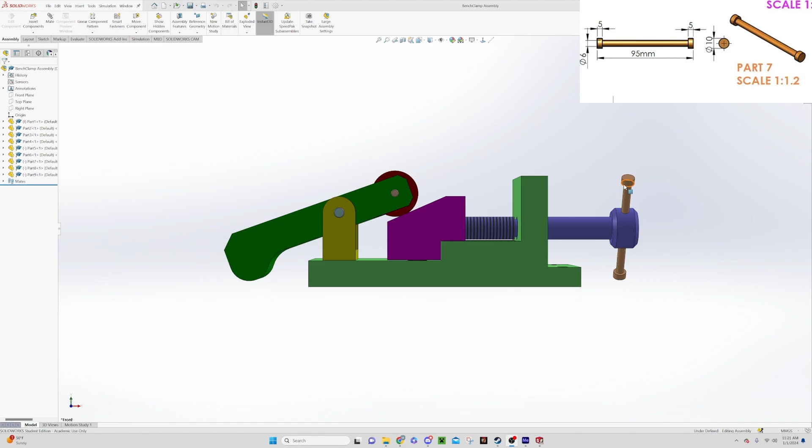In this next video, we will be creating this cross piece here on the handle. You can see here that it runs perpendicular to the screw and would be used to add a little bit extra grip if you were screwing this down.

We will also be creating these two pins that go through and hold in the piece. We'll have to look at some of the other drawings to get our widths for these, because these are not included in the main drawing, but we're going to create them as additional parts for this assembly.

All right, let's start off with part number 7. This is that cross piece that we were looking at for the handle. So we're going to go to the front plane, and we're going to start a new sketch.

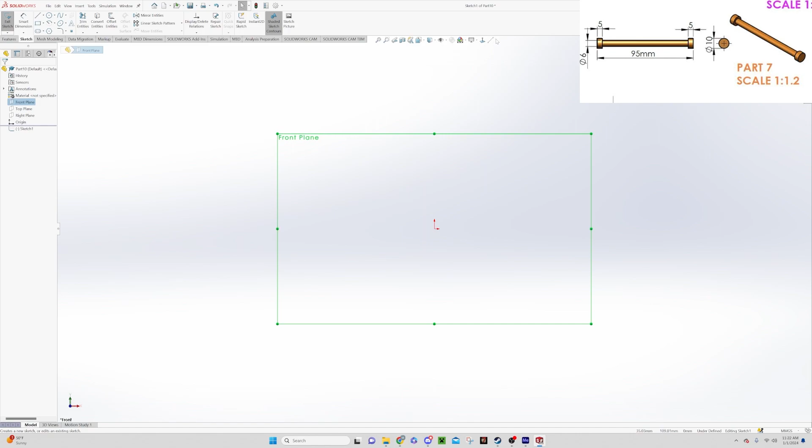Along this sketch, I want to put in 2 reference lines again. I'm going to put in a line here, and I'm going to put in a line here.

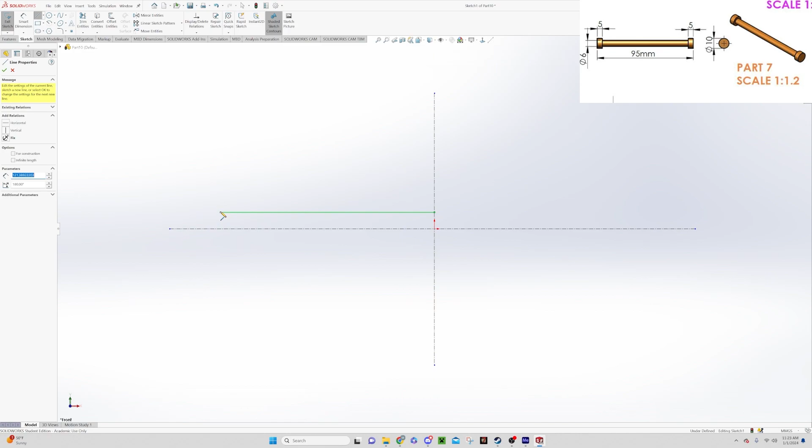Now what we're going to do is we're going to draw one side of basically 1/4 of this piece. So we're going to go with our line tool here, and we're going to start out over here on this edge. I'm going to draw over, up, across, and down.

So we have that done. And now what we're going to do is we can add in some measurements right now, but first let me just do some stuff here where we're going to mirror this entity.

So these 3 lines, we want to have them selected. We can say mirror entity. Entity to mirror, we can select these 3, or 4 I guess. And then we're going to mirror them about this line right here. You can see that makes a mirror on the other side of this line. And then we can say OK.

All right, now let's go in and do some smart dimensions. We want to say, we can look at the drawing from this line to this line. We are 95.

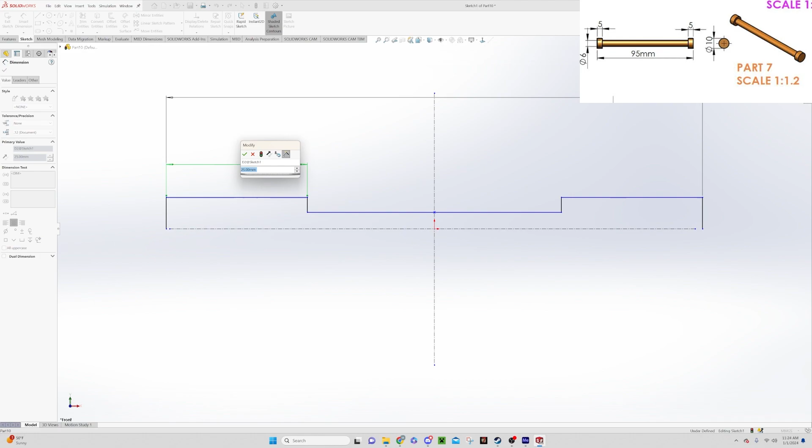This distance here is 5. Not 25, it should be 5. Sorry, 5. You can see that automatically adjusts both sides. And then we know that this total diameter would be 10, so half of that is 5. And you see it lifted off the line.

So one thing we're going to need to do here is we're going to have to make some adjustments, because we didn't draw this line quite long enough, and so it didn't associate this endpoint with being on the line. So let's just say OK here.

What we can do is we can click on this point. Well, let's do a few things. We can click on this line and we can drag it longer. Let's drag it longer on this side. That helps us out to start with.

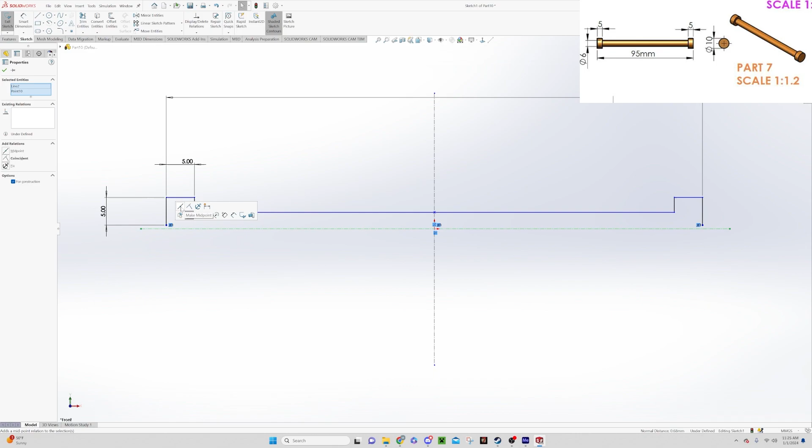All right, now we can click on this point here, push Shift, and click on this line. You get some options here for what you want to be able to do. We could have it make it the midpoint, we don't want to do that. We want to make it coincident, which will mean that this point is on that line. See, so it dropped it down on both sides.

All right, and then finally, the distance that we need to determine is the width of this shaft. So we can look at the drawing and we can see that the inner diameter is 6, so half of that's going to be 3.

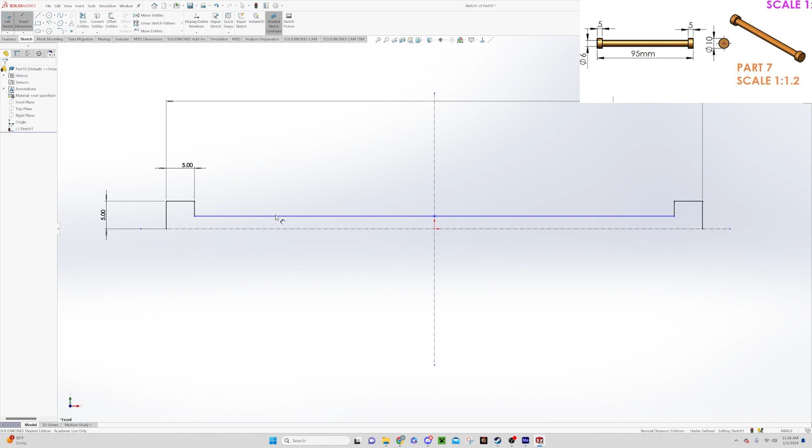So I'm going to say smart dimensions again. Click on the shaft, click on the line. We can say that we want this to be 3. And there we go. Now we're fully defined there.

What we don't have, though, is we could rotate this around, but it's not a closed feature yet. So we'll need to complete this, so we'll have to draw this final line here.

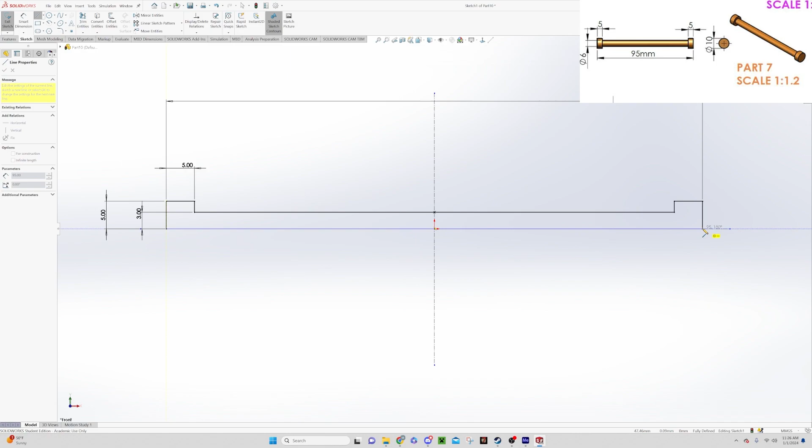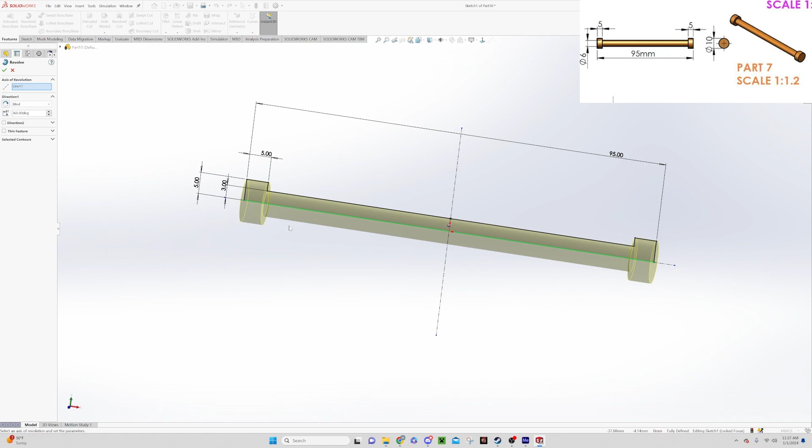There we go, now we've got our feature here. So now we can go to features and say revolve boss base. You can see it already picked the line it wants to revolve around, because that's the one that makes sense to the computer. We could revolve it around this other line, but it wouldn't make as much sense. We're revolving around there, so we can say okay. And there we go, we've got our final piece.

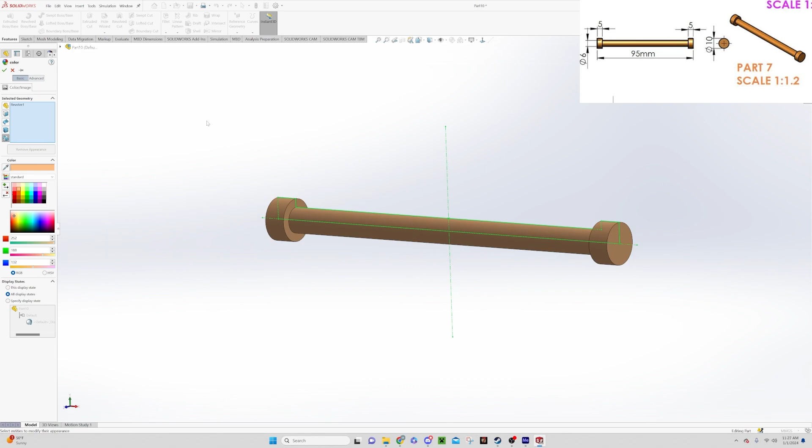Now one thing we want to do is change its color, so we'll go up here to color, and we'll make this final piece that orange color. Something like that, looks fine. Then we want to save it, and we'll save it as part 7. Like before, I already had this saved.

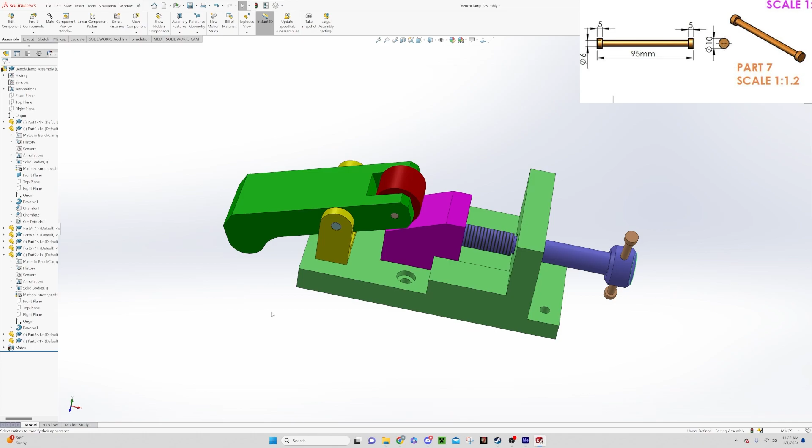Okay, so now we're going to make these pins. The 2 pins are actually different diameters and different lengths. If you look here, we have the width of this green piece, which holds the red cylinder in place. And then we have the width between these 2 yellow pieces that basically creates that pivot point. So we'll have to pull those parts up on the drawing and look at them to determine what our width is going to be.

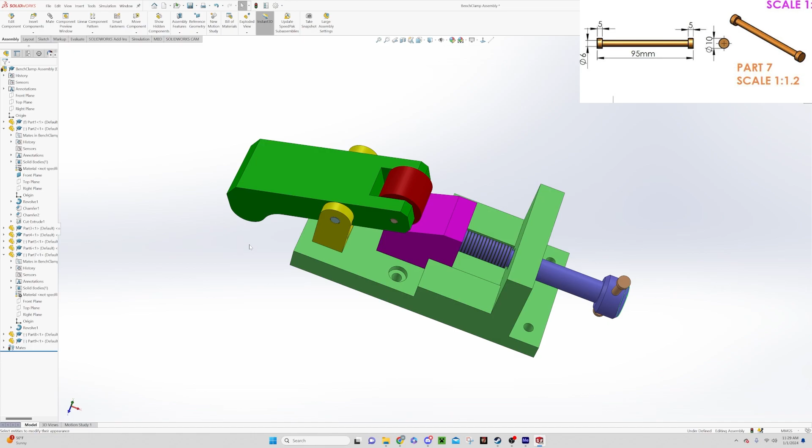All right, so the first pin we're going to make is the one that's going to go through this part 3 here. It's the pin in the back that holds the cylinder in place. So we look at that, and we see it has a diameter of 6, and we can see that its width is going to be 54.

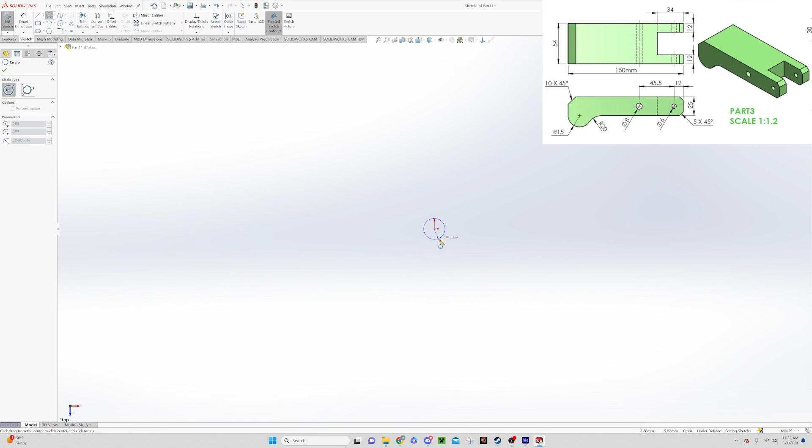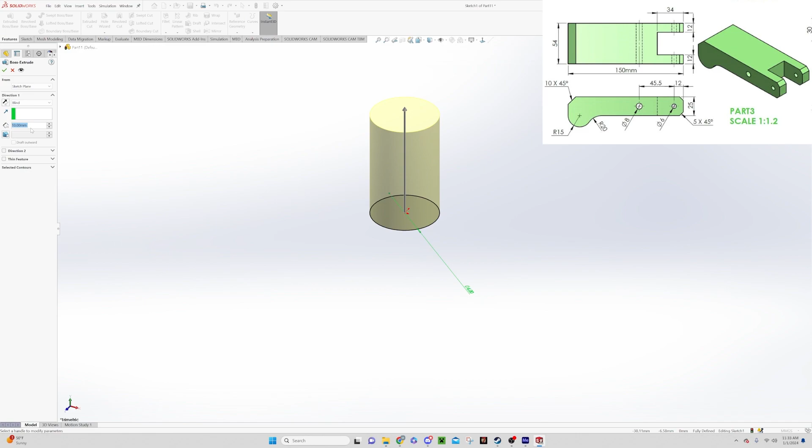So there's a few ways we can do this. Let's go with the top plane version. We'll do a sketch on the top plane, starting from the origin, and draw ourselves a circle. Smart dimensions, go in here, I'm going to say we want to make this 6. So now we have a circle that's a diameter of 6. We know the height is going to be 54, so we can do extruded boss base and make it 54. All right, so that gives us our pin. That's a pretty quick way to do this, actually one of the quicker ways.

Let's make this pin look a little nicer by giving it some chamfers along the edges. If anybody's ever driven in a pin, you know that having the ends a little bit tapered makes that easier. Up here you can see our fillet tool, and if we do the drop down below that, we actually get the chamfer as well. Depending on how big your screen is and how spread out your toolbar is, it might look a little different, so you might have to search around for that fillet tool a bit.

The default here is a 45-degree angle, which we'll leave alone, but it's going to be a 10mm chamfer. Knowing that the overall diameter is 6, we know that 10 really isn't going to work, so let's go with something a lot smaller. Let's start with 1 and see how 1 looks.

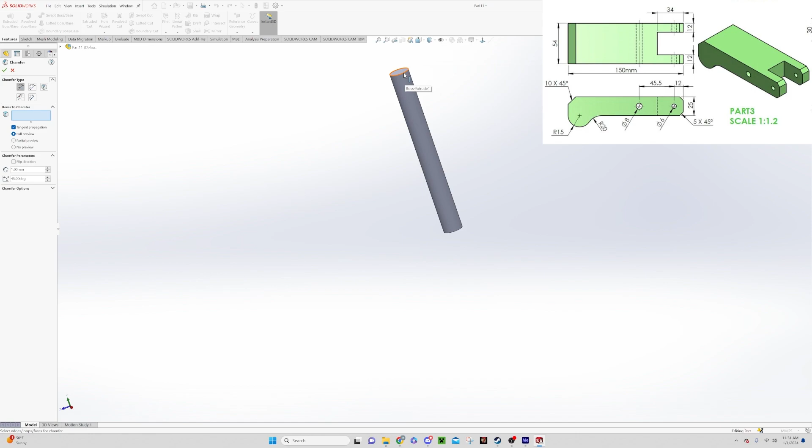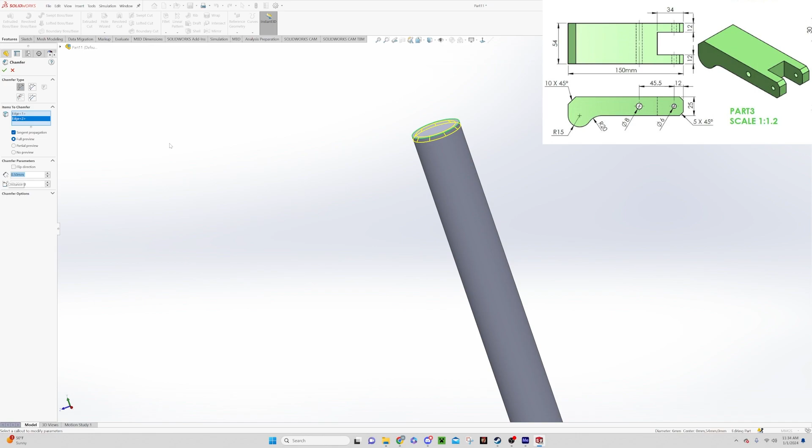Then we can click on this line here, and this line here, because we want to chamfer both of them. We say okay—actually, let's not say okay yet, because we can see our preview here, and I think that's going to be a little too much. So let's go here and say 0.5 instead. I think that looks a lot more realistic to what a chamfer would look like on a pin. And there we go, you can see our edges are broken in a little bit.

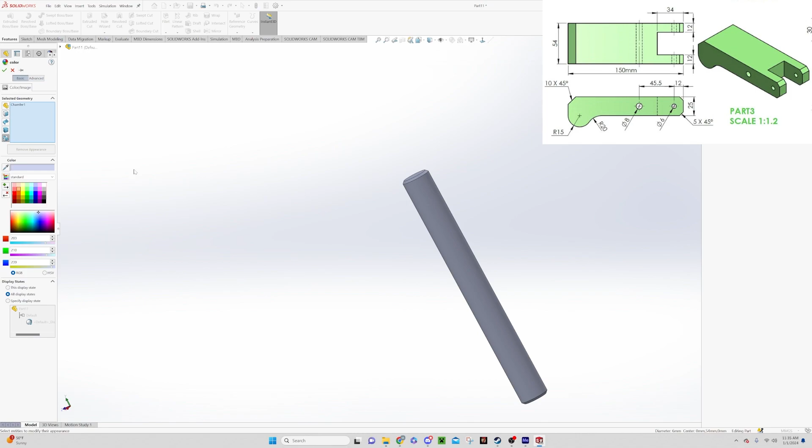Now this piece isn't in the drawing, so we can just leave it gray, or we can go up and give it a color. Let's make these pins purple. And right now you can see that we actually had the chamfer part selected, not the whole piece.

So let's go in. You got to click on the rest of the piece to get the whole thing purple, and we can say okay.

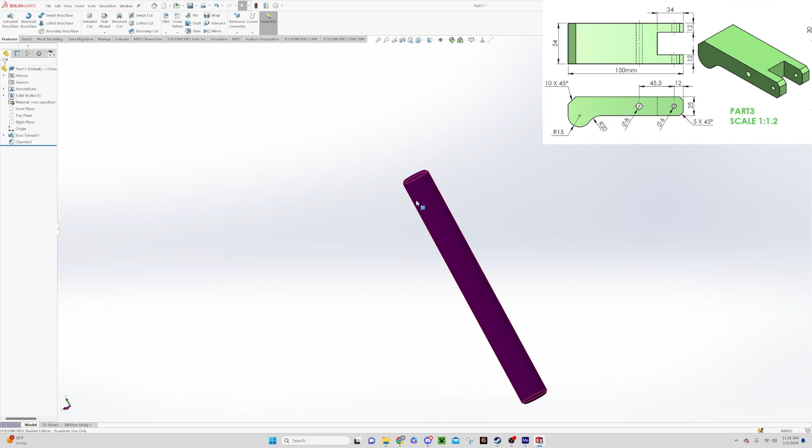All right, let's save this as part 8, and then the next pin will be part 9. Once you've done the save on that, you'll go up and say new, and we'll say new part. Okay, and we say okay.

All right, so now we want to make the pin that goes through our part number 4. We can see up here on part number 4 that we have a diameter of 8 on the hole, and a width of 70. Let's draw this one slightly different than we did the previous pin, even though that method is probably the quickest and easiest way to do it.

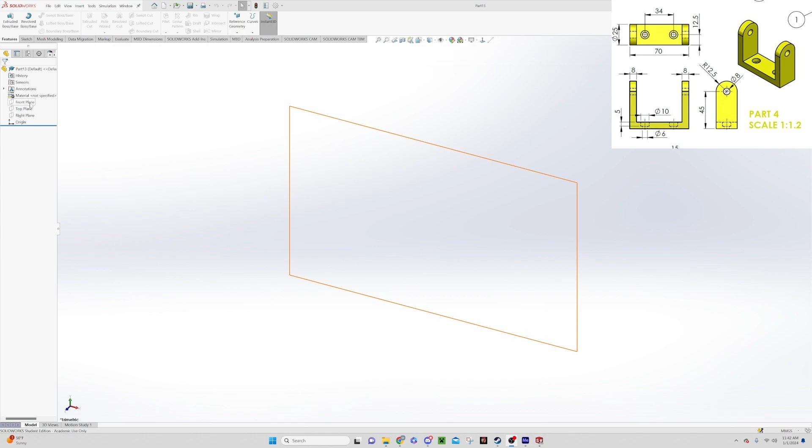We're gonna mix it up a little bit, mainly just so we can show some different skills and different tools here. So let's go to our front plane, go to our sketch here, and let's make ourselves some reference lines.

I find myself making these reference lines a lot when I'm drawing, just because it's kind of convenient to have them in there. It gives you a place to lock stuff in.

All right, and now we're going to use our line tool here. I'm going to draw out and back over. Push escape. All right, now let's mirror these entities.

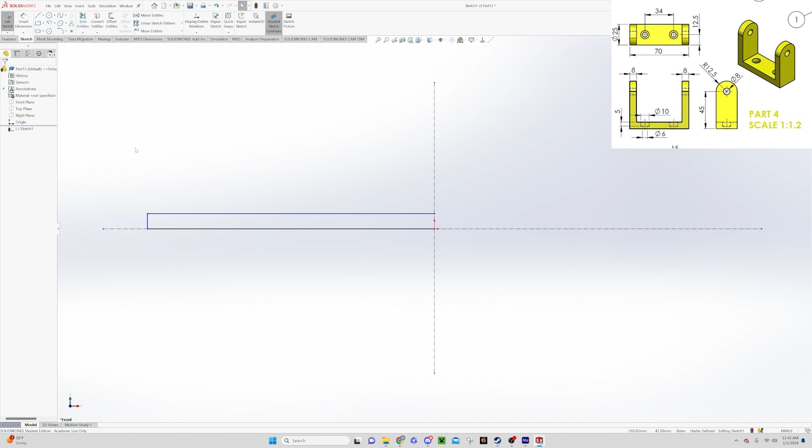So we can go and we'll go mirror entities. We'll select the ones that we want. If you draw it down from this side, it only selects the things that are 100% within the box. If you pull up from the other side, it will select anything that's being touched. So we're gonna mirror these 3 lines.

We're gonna mirror about this line. All right, we say okay. And you can see that gives us a closed feature.

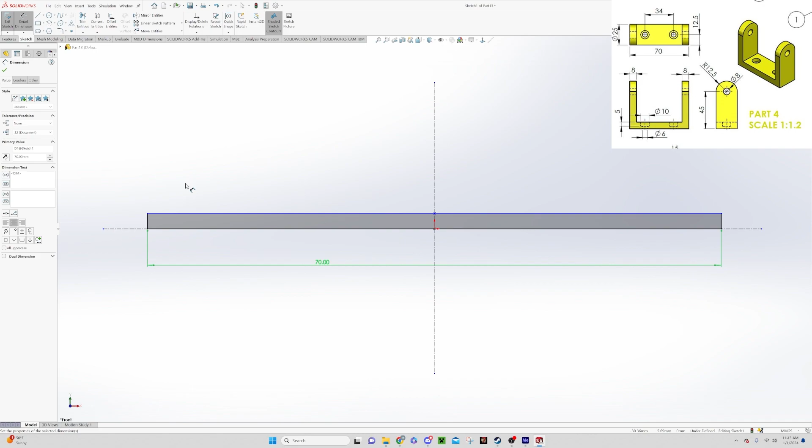Let's go to our smart dimensions here. We can see that our total length is 70, so we drop down here and say this is going to be 70. And we can see that the diameter of that pin is 8, so half of that diameter is going to be 4. We go here and say this is 4.

All right, so what we could do is just do a revolve boss base like we did with the others, and then use the chamfering tool at that stage. Instead, let's use the chamfering tool in our sketch, and then we'll do our revolve boss base.

So our chamfering tool in the sketch is up here in this corner. We have our sketch fillet, and if we do the drop down, we also have a sketch chamfer. Once again, default goes to 10, so let's make that 0.5.

And then we'll go over here and pick this corner. It's gonna say that some of our sketch constraints will be lost, which is fine. We just say okay, and then we go over and do the same thing on this corner.

All right, and there's a lot of information going on here. Basically, it's just showing that it's 0.5 if we drag this up from that corner, and 0.5 from the corner to the end of the chamfer. It looks very cluttered there, but that's just because of the size of the text.

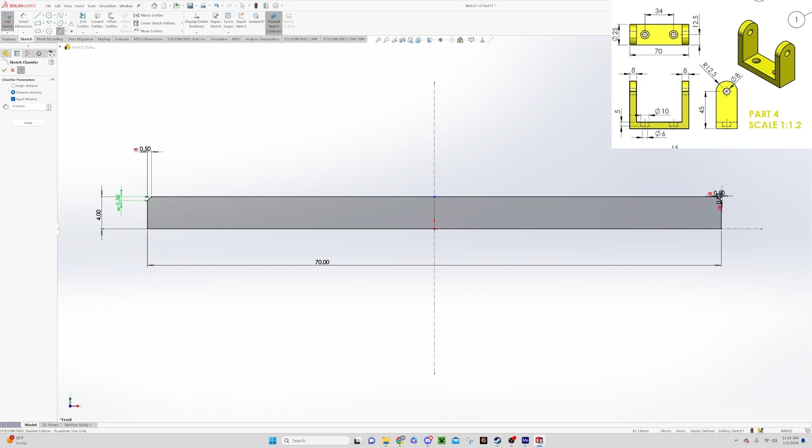All right, so now we've got this done. We can click the green check mark, and now we can go to feature and revolve our boss base. It's going to ask what axis of revolution we want to revolve around. We're going to pick this line here, and you can see now it revolved around that line and created our second pin.

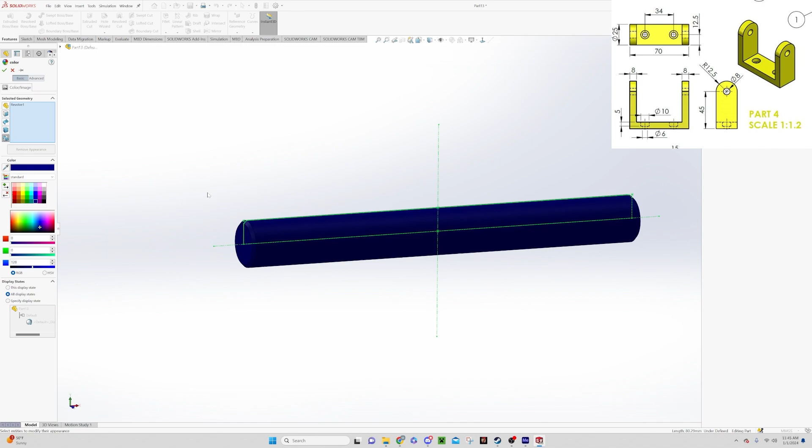All right, so now we'll give this a color. Let's go with a dark navy blue. That looks pretty nice. We'll say okay, and we'll want to save this as part 9.

And that wraps up this part of the build. We did the handle and we did 2 pins. So, all right, I'll see you next time.